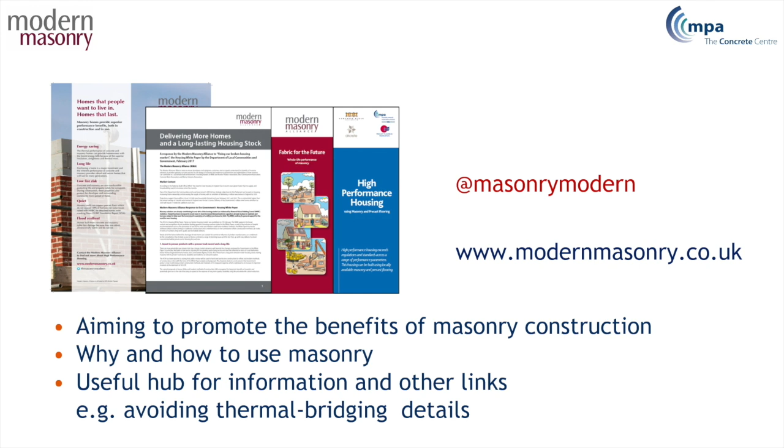Chris has covered what modern masonry is up to. Clearly there's an overlap, and I think it's worth reminding you that something like 85% of housing at the moment has an inner leaf of concrete blocks. You may not know they're there. Many people don't actually know what their houses are built of, and most of them think it's the bricks on the outside, assuming it is brick.

So it's worth just giving it a quick tap when you walk round, and if you get that hollow sound, then you know that it's probably not going to be concrete. So we're talking about really a majority of housing as it's currently being built, and as it's currently meeting standards.

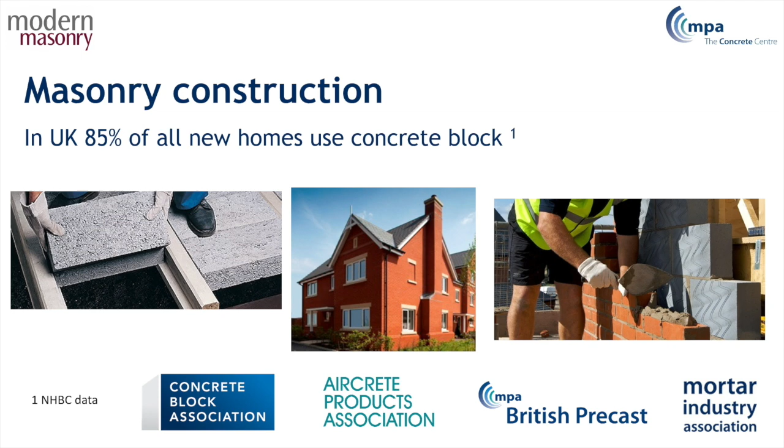I'm going to be talking about well-being as well, health and safety and well-being. Some of these slides are taken from the publication I showed, which was a 10 years review of key issues for industry and those involved in house building and design. Well-being is a subject that has entered the marketplace probably too late, you would argue. It's not just occupants of housing, it's occupants of offices, and it's trying to understand how to create environments both now and in a changing climate in future that will make sure that we're both healthy and comfortable.

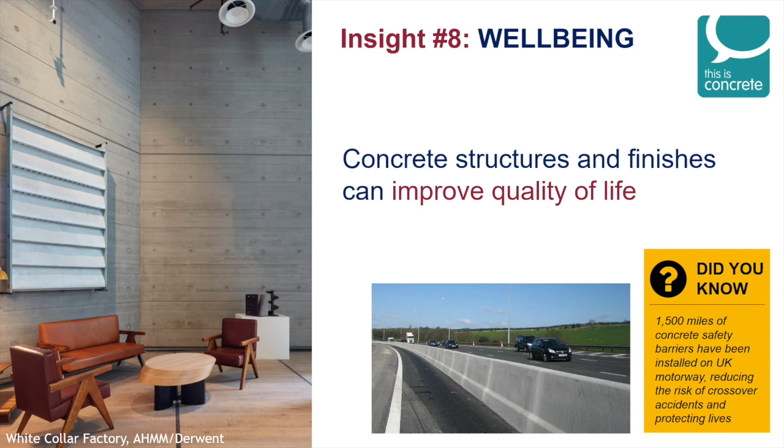So I'm going to move on to that, but I'm also going to touch on some other themes that designers and specifiers are now being bombarded with. They're all aiming at the same place, but from a range of different directions. This quote, resilience is all about being able to overcome the unexpected. Sustainability is about survival, and the goal of resilience is to thrive, I think is an excellent starting point for architects, designers, and those involved in the built environment in trying to look at the long term.

And this is also reflected by the UN Sustainable Development Goals, which you may or may not have read about. But it's very interesting to note that healthy buildings, or health and well-being, is item number 3. It's only when you get to items 11 and 12 where you get down to the built environment and building sustainably. They're all important, of course, and they all have interfaces with each other, so you wouldn't ignore any of them. But it's a change, I think, in perspective as to how we look at designing our built environment.

One of the issues, I'm going to have to put my glasses on, one of the issues that I've raised in a couple of slides here is health and safety. If you're in business, health and safety is one of the key issues, whether you are a producer of products, if you're a building owner, if you employ staff as a company, health and safety is right up there.

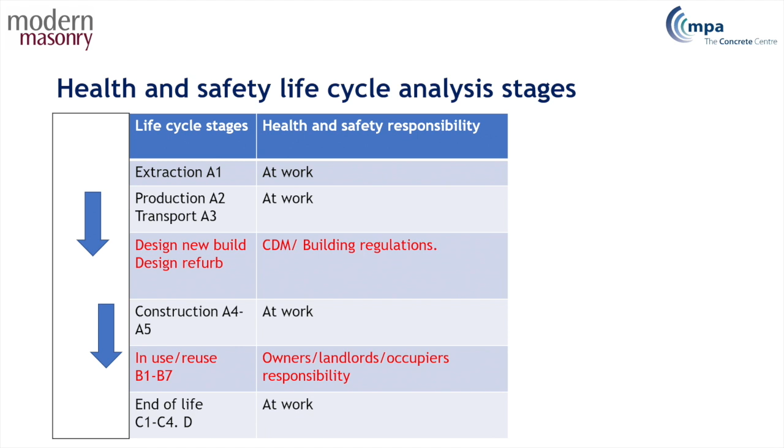But in a couple of slides, I've just looked at some of the responsibilities. At work means health and safety at work, but designers, they've got CDM, and building regulations are there to help you. And then once the building's built, you've got owners, landlords, occupiers who are suddenly responsible for a building. And the health and safety of that and its ongoing upkeep is obviously a key issue, both in the private sector and the public sector.

If you look at health and long-term well-being and the in-use part, of course, some of the responsibilities get extended. And one of the material issues that is coming to light is that you're responsible for the building, you're responsible for the design, its construction, you then own the building, but someone is then also responsible for what happens when it gets demolished. Are those materials safe to demolish? Can they be reused? Can they be recycled? Are they useful at the end of life?

And in an earlier discussion today, we were talking about how long should buildings last. If you're a building owner, you usually want your building to last as long as possible.

Although the lifetime of a mortgage seems to be extending quite a long time. I'm told that if I get to 80, I can still have a mortgage. A few years ago, it stopped at retirement age. I'm hoping to get to 80, by the way, but I'm hoping to get rid of my mortgage before that.

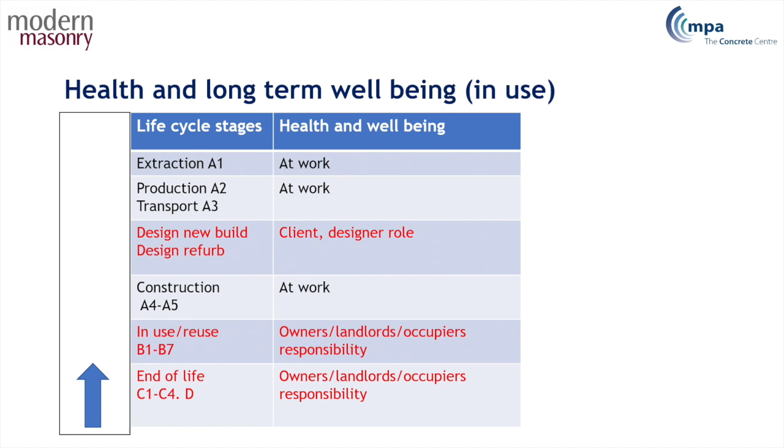But some of these measures that were used in terms of how people looked at property life and how long they were going to last are having to be reconsidered. So health and well-being is now recognised by government as an issue for public health and safety. They're looking at reliance on the use of healthcare services. I'm pleased to say that most of us are living longer. Most of you have achieved quite something already, but also there's whole levels of educational attendance and attainment and productivity and absenteeism if you're running a business, which is all to do with healthy buildings.

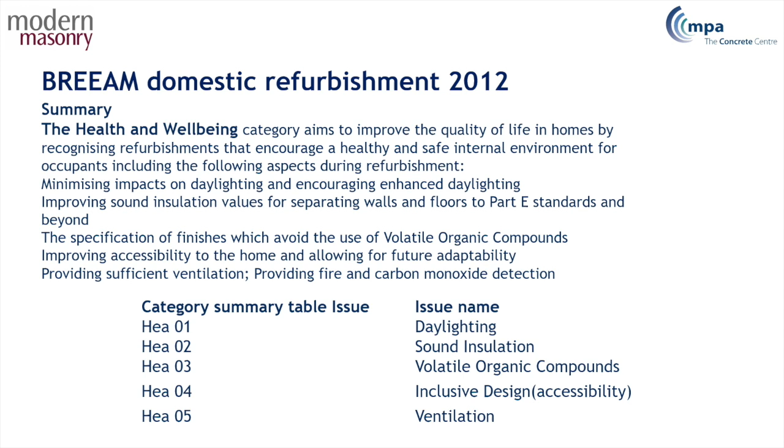And there are some new standards around which you may or may not have come across, originally very much driven by the office and commercial market. So WELL standard, Fitwel and BREEAM have all had healthy building issues built into them for some time. And BREEAM domestic refurbishment also has a healthy building. It's interesting to look at the key issues which touch on some of the issues that Tom touched on: daylighting, sound insulation, the emission of VOCs, for instance, and ventilation. So all those issues that Tom touched on are very much linked to how to produce a healthy environment.

And more recently, probably about 3 or 4 years old now, is the Home Quality Mark, which BRE have brought out to address housing. Unlike previous standards, it's very much focused on the house owner rather than the house builder. And so I've listed a whole range of things which I won't go through, but they are all key issues there. I highlight comfort, indoor pollutants, daylight, internal, external noise, sound insulation, and then durability of construction, and then recyclable waste, water efficiency. So there's a whole range of issues now that are moving up the scale in terms of issues that designers need to take on board.

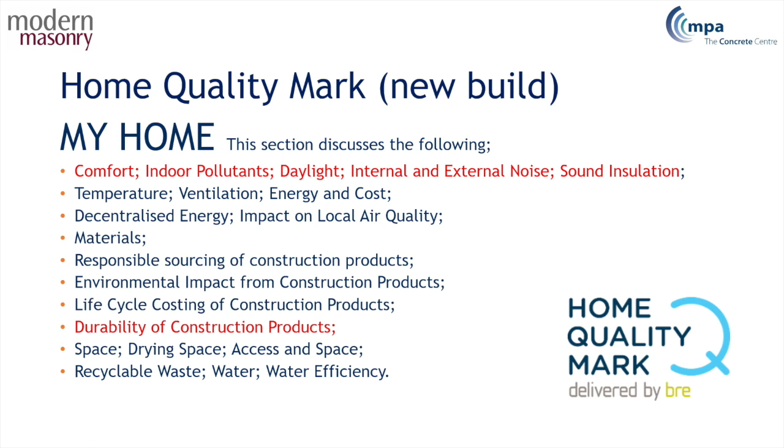So moving from health and safety and healthy beings then leads me on to the resilience part of my talk, because I think it's fair to say that we are recognising that the climate that we're building our buildings for is changing. We're designing buildings for 50 or 100 years' time, and even now we're getting the odd freak weather which challenges some of the design considerations for which the buildings were built.

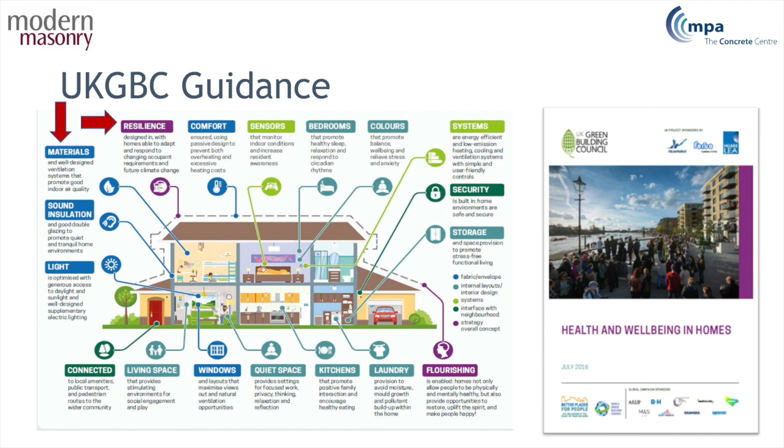The UK Green Building Council has done a whole thing on health and well-being in homes, and I just draw your attention to the top left-hand corner, which is what I'm going to be talking about, which is choice of materials and then the resilience issues. End-of-life resilience I've touched on, but when you're talking to a client, very few clients as an architect have I met who know how long they want their building to last. This morning we saw a client who knew he wanted it to last at least 100 years or longer. But these are key questions when you're making material decisions and design decisions about property.

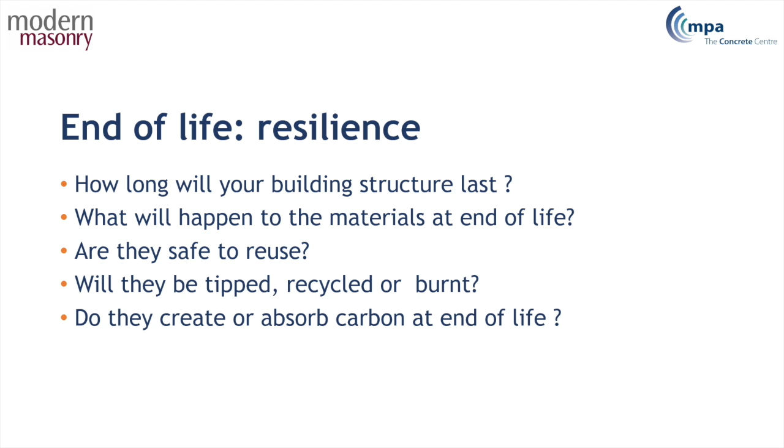So how long will your building last? What will happen to the materials at end of life? Are they safe to reuse? Can they be recycled? Do they have to be burnt? Do they create or absorb carbon at end of life? These are some key questions.

And I think it's fair to say that most of us recognise that keeping a building to last as long as possible is a very good way of meeting some of the circular economy requirements. The longer it lasts, the longer your investment in product, materials, carbon is useful, and the longer before you have to then downgrade the building to a point of having to rebuild it. So reusing your structure is pretty key to that in a whole range of building types.

There are those who are looking for design for demountability as a way forward. It's probably difficult to justify the cost unless you have a relatively short-term building, and I don't think anybody's really worked out what those key parameters are yet. But it's worth pointing out that concrete and concrete blocks are 100% recyclable, so at end of life you can reuse the material.

To touch on something that Tom loves to talk about but wasn't allowed to today - when you crush concrete at the end of life, it reabsorbs carbon to something approaching 20% of the original embodied carbon. So if you're taking a whole life view of your building materials, that's something you need to think about.

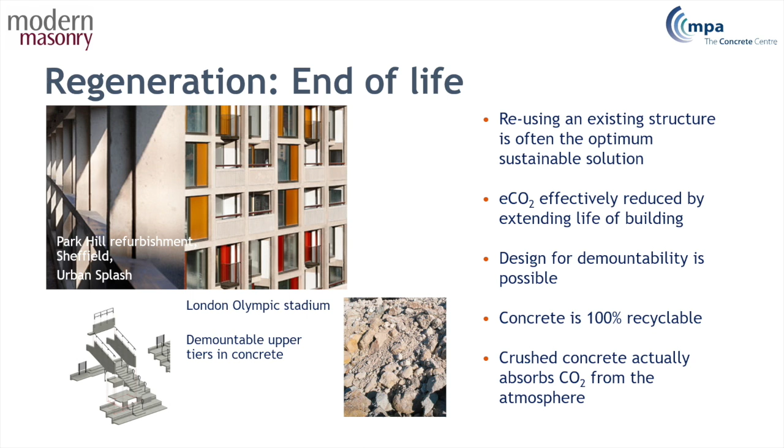I think it's fair to say there's a lot of noise about building lots of new houses, but we are struggling to get anywhere near the 300,000 that I think is generally accepted as a minimum. I've taken this article from Housing and Planning, and based on the current replacement rate and our building rate, the houses we build today need to last about 2,000 years. Quite clearly very few of them will, unless they have an awful lot of work done on them. So even masonry houses lasting 2,000 years, I think, would be a claim too far.

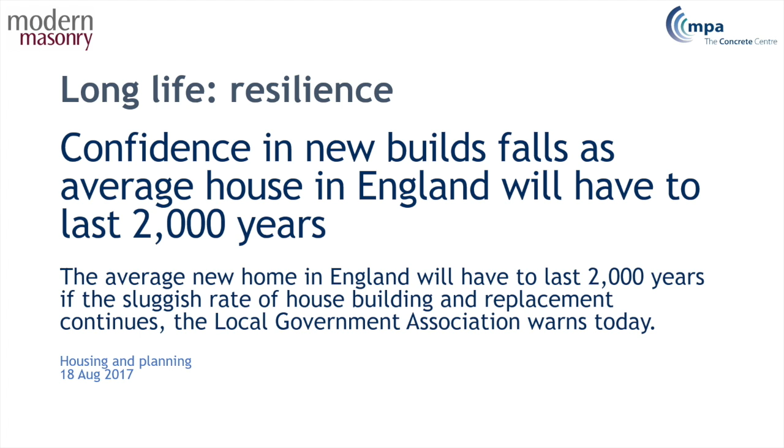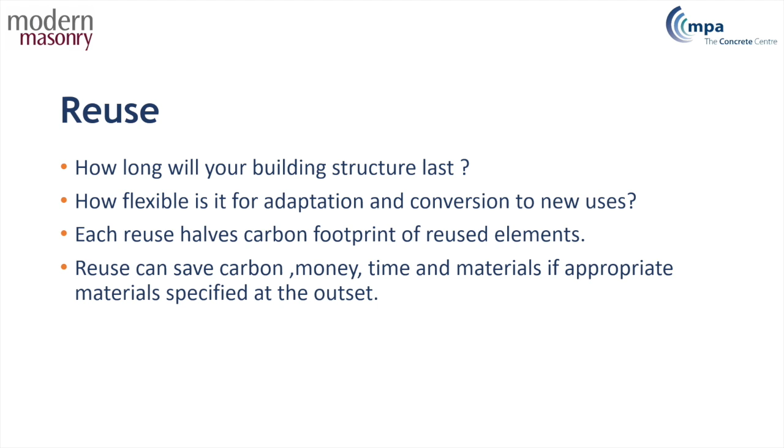So again, looking at reuse is quite important, and this re-emphasises some key issues, because it's not just how long your structure lasts - it's how flexible the building is for change, to accommodate over a longer lifetime its use.

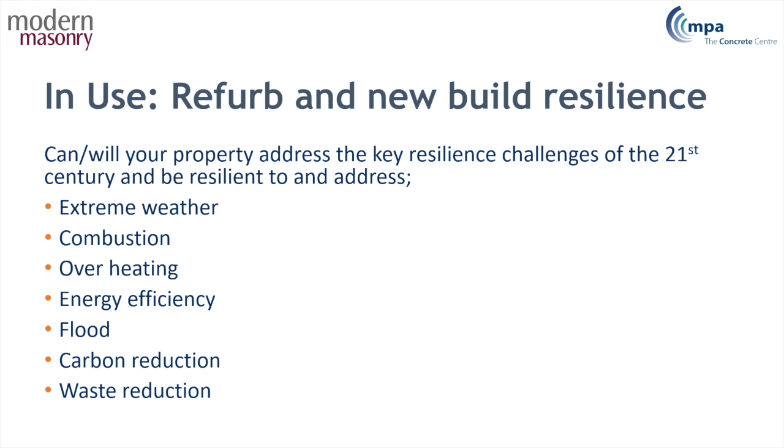I think the other thing we talk about in terms of resilience, looking at refurb and new build resilience, is some of the things we should be designing buildings to cope with in the future. Extreme weather I've touched on, combustion, overheating Tom's talked about, energy efficiency, flood, and then some key issues like carbon reduction and waste reduction, which we need to be thinking of.

We've already seen, and unfortunately regularly see, flooding and storm damage on the news. And the overheating issue came about, I think, a few years ago - there were thousands of people who died in Europe over a very hot summer. And we've had a very hot February.

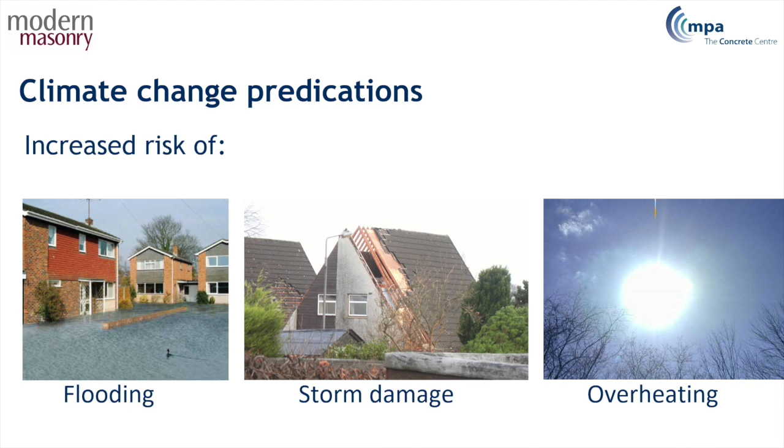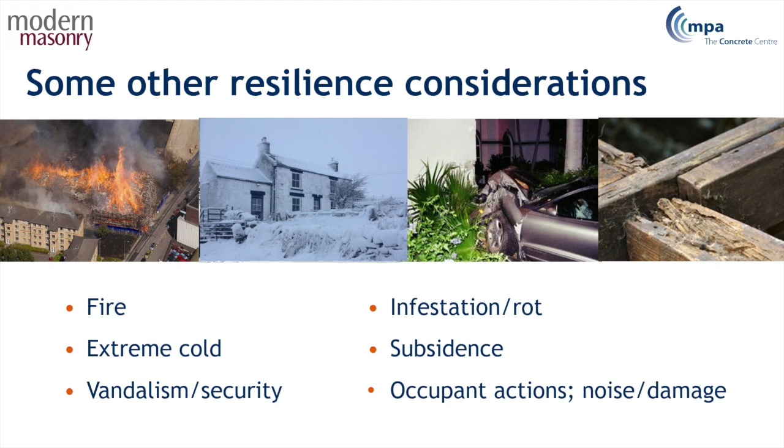So other resilience considerations that you as designers and/or building users or procurers need to think about are a range of how materials operate. And I think it's fair to say that resilience, if properly considered, is good business. People don't necessarily see housing as business, but actually it's people's largest asset as an individual, and clearly a key part of meeting the requirements of a growing society with growing aspirations.

So I'm going to talk briefly about fire. It's a sensitive subject at the moment, and we're still awaiting to see how the post-Grenfell fallout will impact on standards, with consultation in Part B going on at the moment. But it's fair to say that fire safety of occupants is essential and it's part of building regs, but there's not a lot in building regs about the impact on the property itself.

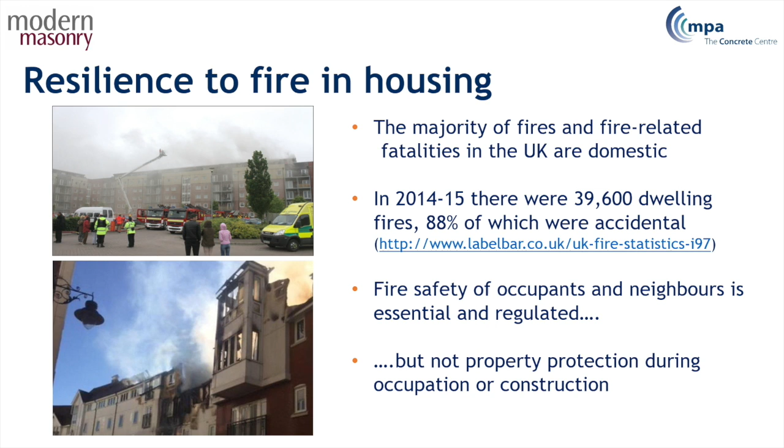Getting people out is a key consideration, no one would argue with that, but then the question is how long does the fire burn and what's left afterwards? I think that's a key issue we need to be considering. It's a sustainability issue in the sense that buildings set on fire by vandals halfway through construction is not a sustainable solution. It's criminal, no one would argue with that.

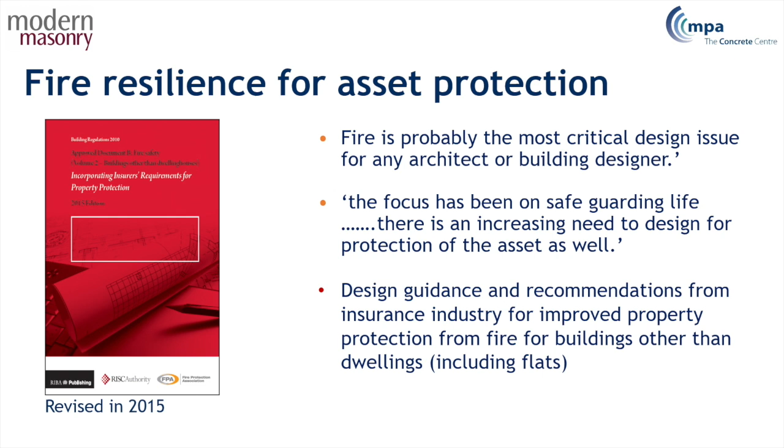But there are some key issues there we need to be thinking about, how we don't have to build things twice. There's a range of design guidance and recommendations from the British Insurers Confederation, because they clearly have an impact - people have to insure buildings and they're worried about the risk arising from some building types and constructions. So I'll leave you on the fire safety bit.

Occupier behaviour is a major reason for fires, but I think it's fair to say that the design characteristics of a building will affect the potential for a fire to spread or to be undetected, and therefore impact on the likelihood of fire causing harm. And those are not my words - they're the words of a government paper in English Housing Survey.

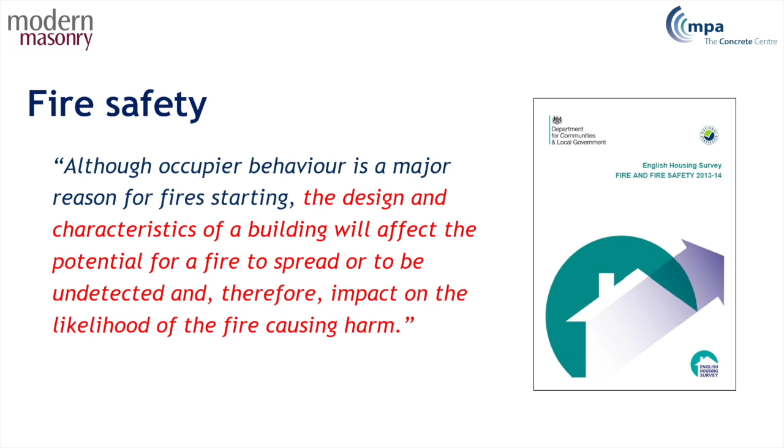So the message I would give you is we ought to be looking at low risk construction details using non-combustible materials. Concrete and masonry obviously fit into that. And then look beyond the materials at the consequence of detailing, poor workmanship and alterations when the building's finished. What do people do? They drill holes, they cut openings, they leave buildings not in the state they were originally designed, and I think that's an issue we need to be much more careful about. So careful detailing is required, as it would be with all materials, but I think it's fair to say masonry doesn't need special measures for health and safety during construction.

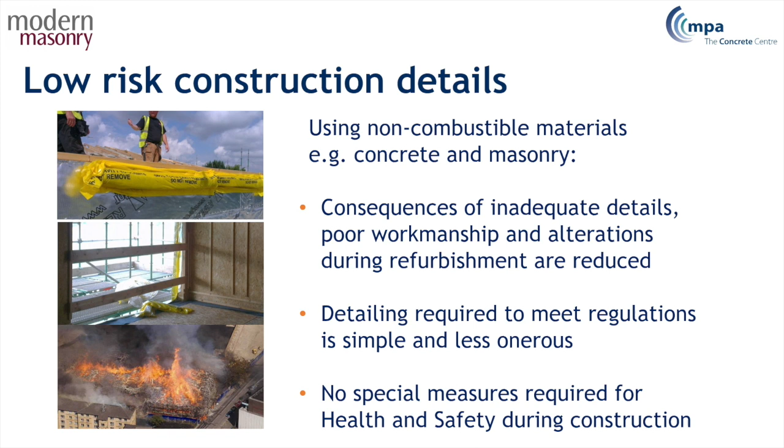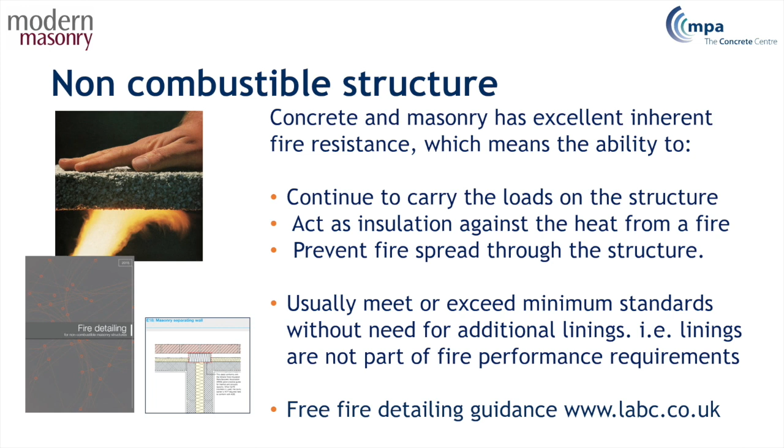So we'd promote a non-combustible structure. It does have key benefits in the event of fire, but it doesn't prevent fires. So I'd also look at some very good free fire detailing guidance issued by LABC, that's the Local Authority Building Control, and they have a range of details that are appropriate for masonry construction and how to make sure the spread of fire is limited.

So moving on to other resilience issues we need to be thinking about. We've touched on overheating, Tom's talked about it. I'm not going to spend too long on this because there is some overlap. But interestingly, whilst there is a heat map, even the Scottish government are worried about overheating, and it's not necessarily because they'll get the same temperatures as the southeast, but a lot of it is to do with lack of ventilation and bad design. So overheating can be a problem even in Scotland.

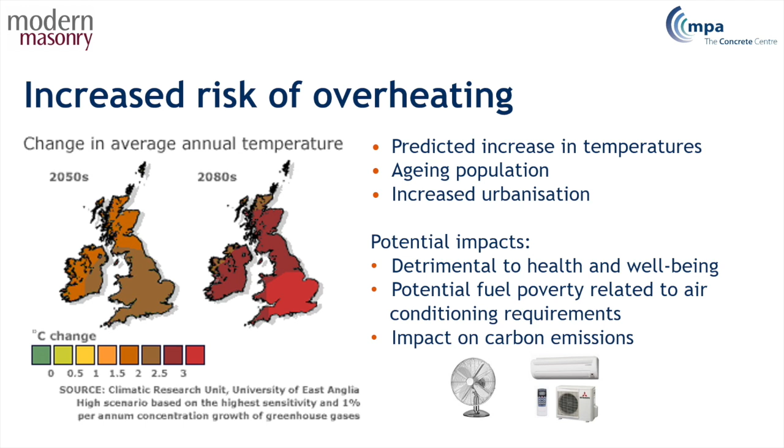It's difficult to consider. I've lived in Edinburgh and I think it's one of the coldest places I've ever spent my time in, but it was in one of those tenement buildings built out of lots of solid masonry, so I blame the construction.

So one of the things Tom normally talks about is the passive approach to reduce overheating in new homes, and this is using ventilation and some key issues in terms of orientation, solar shading, planting. You can plant to protect your house from too much sunshine, the thermal mass aspects that Tom's spoken about, ventilation, and...

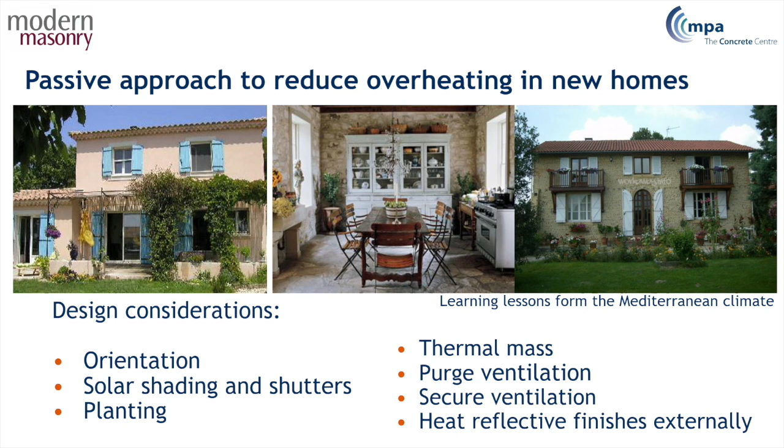I used to have a house in the south of France, and I can remember there, we're promised that climate by the way, but unfortunately not quite in my lifetime, but the population there moved from one bit of shade to the next, and they keep their shutters closed, they keep the sun out all day, so there are ways of living to overcome this already existing where Mediterranean temperatures exist. And if the warming happens as predicted, the south of England is certainly going to be having very similar temperatures, not in my lifetime, but certainly in the lifetime of the buildings we're designing now.

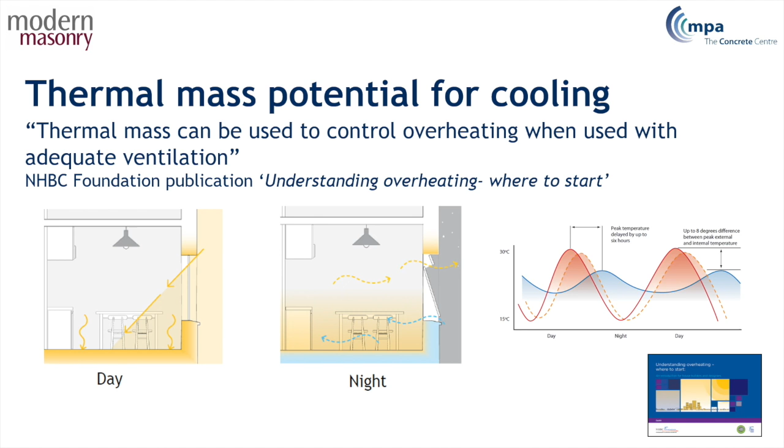The thermal mass potential for cooling, these are one of Tom's slides, and I'm not going to go on, but it does help create and even out temperature differences, both in winter and summer. It does have to have ventilation with it. It has to work in that way, and it works in some buildings better than others. It's not a panacea for all cooling, but it is something that needs to be considered as a designer when you're looking at residential, and it's almost a no-brainer in office buildings.

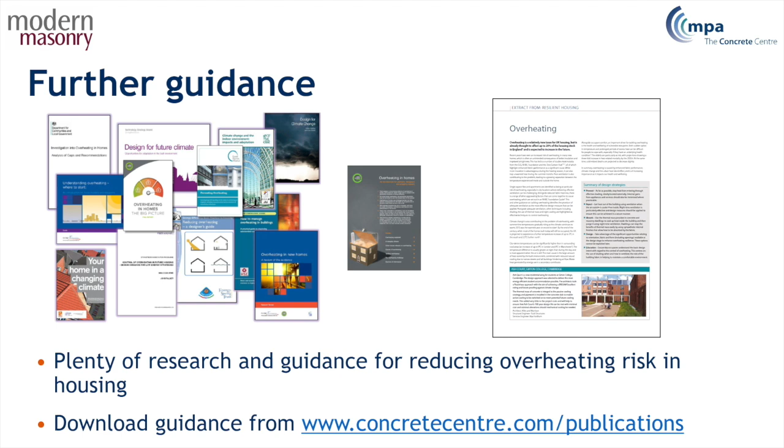There's a lot of guidance, not from us, I hasten to add, from a range of sources. We have got an overheating brochure on our stand, but there's a lot of guidance from NHBC, for instance, and I thought for architects it's always good to relieve the words with a few pictures of buildings that have used thermal mass effectively with masonry construction.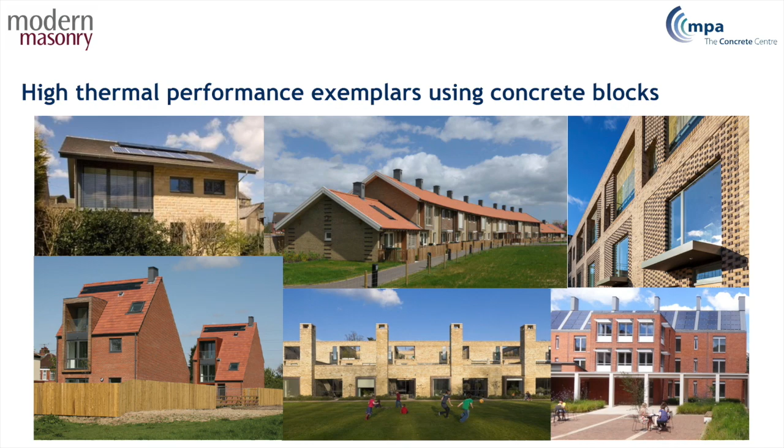Tom has already alluded to some of these publications available for free on our website. And I think Tom admitted he's about to spend his life updating Part L when the government reviews building regs, which are coming up this year. So we'll be looking very closely at how that impacts.

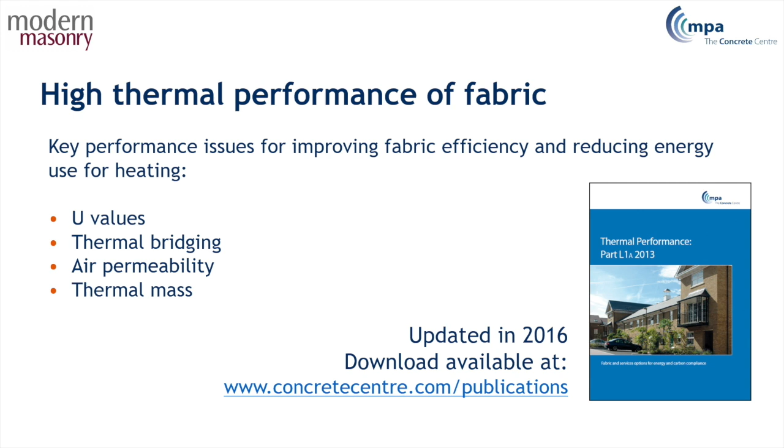I think we all thought we'd got to a point where the external fabric of the building was at an optimum level. A little bird tells me that might not be so. So we might be finding that higher levels of insulation to the envelope are on their way, with all the implications that go with that. But I don't know that, that's just me guessing. Either way, I think combined with changes in Part B and Part L, we're up for some quite significant review of how we build and design our buildings.

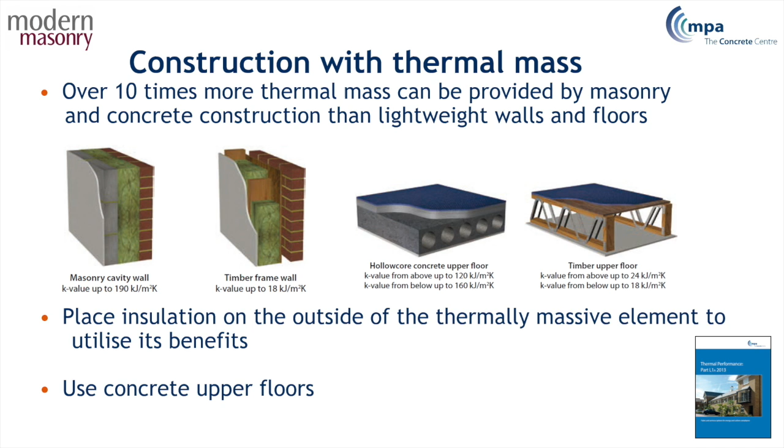So Tom's covered the construction with thermal mass, walls and floors. I'm not going to go into that. So we then move on to flooding.

Unfortunately, many of us live in areas where flooding and Environment Agency warnings are a familiar tale. Those of us who've lived quite a long time can remember whole bits of London being flooded. A lot of that has been remedied by good measures, but they still reckon that 1 in 6 properties are at risk of flooding in the UK, and clearly the increase of 40% in residentials exposed to flooding by the 2080s is a pretty frightening thought.

I think there's a very simple argument, that we shouldn't be building where we are building, but unfortunately the economics of using floodplains for housing drive that, and still are driving that.

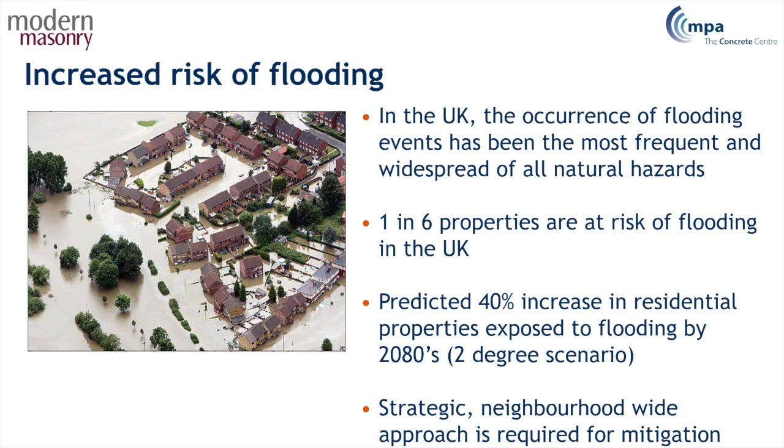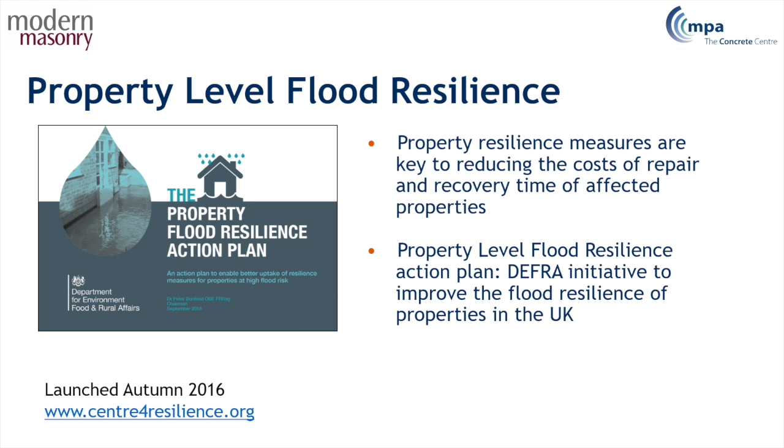I think there are some significant measures that are now reasonably being taken to ameliorate some of the impacts. There is a document I'd lead you to, the Property Level Flood Resilience document, which came out in 2016 as part of a DEFRA initiative to try and address this issue. I'm afraid that all these resilience issues have been overtaken by Brexit in the last couple of years, but hopefully we'll get back onto more reasonable subject matter soon, without hopefully the flooding that might provoke them.

It's also worth mentioning that flooding doesn't always happen where the Environment Agency says it's going to. We quite often get flash floods from places that no one anticipated, so it's worth looking at the local geography and the potential. Unfortunately, if you're mining in Brazil, there are some uncertainties in terms of impacts of sudden failure of some of our infrastructure. And even at a water pipe mains level, it can cause pretty good chaos in the UK.

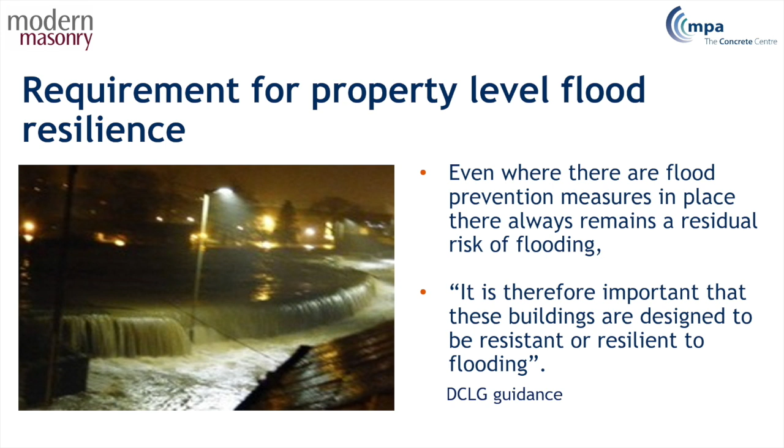So the latest guidance is BS 85500, not to be muddled with 8500, which is the latest concrete BS, lightly reviewed. Sorry about that, but I couldn't resist.

There are some clear definitions and recognition in there of some of the things that concrete can do and timber can't. Again, that's something that needs to be looked at by a designer when he's making those design decisions.

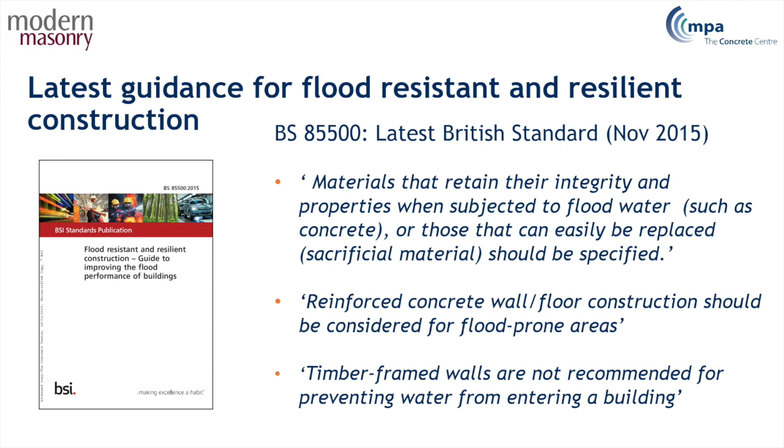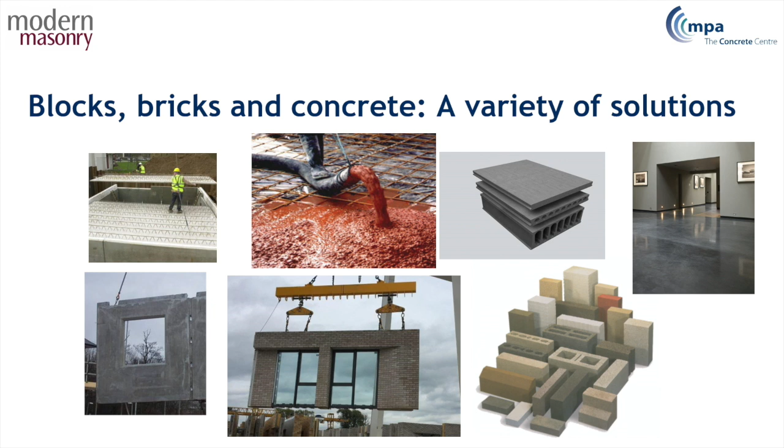As you know, concrete comes in a variety of forms. One of my colleagues calls it like mixing a cake mixture, it's just a matter of which bits and what parts you put in to come up with what recipe. So the variance and the variety is enormous. When you say concrete, people think of one thing, but actually it's thousands of different potential materials and makeups that can be designed specifically to suit a particular requirement, and they are.

I don't think anybody can talk about concrete at the moment without mentioning embodied CO2. It's not something that you can avoid, it is an existing issue. But interestingly, if you look at the NHBC guidance on housing, the difference in embodied CO2 between a timber frame house and one with masonry at day one is negligible. And if you take into account the thermal mass benefits over the life, after about 11 years, it's overtaken by the efficiencies of thermal mass. And after that, of course, there are huge benefits.

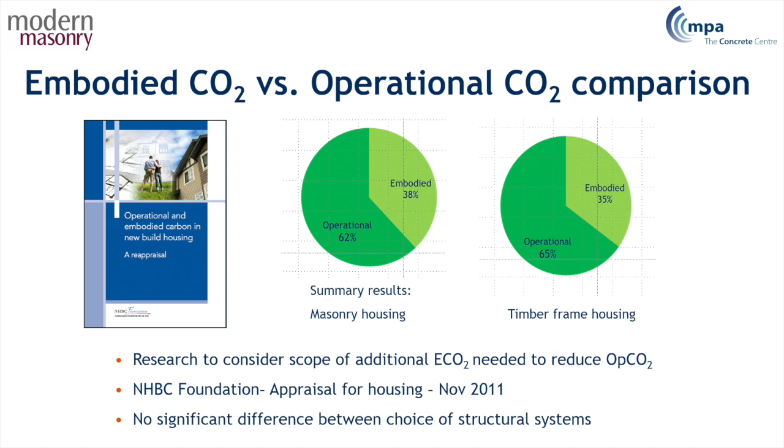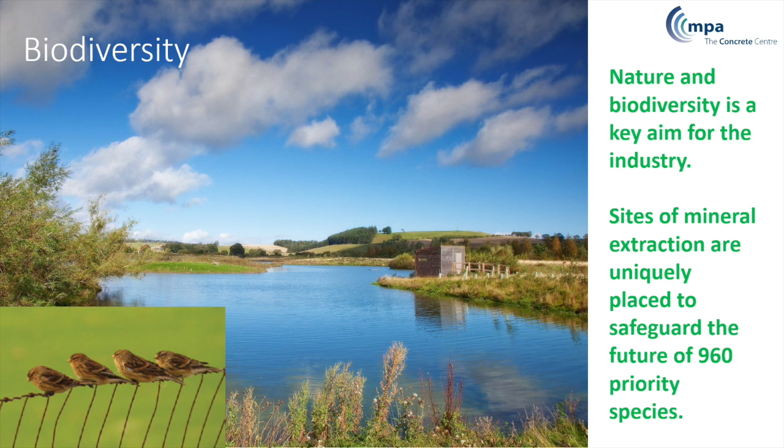It's always nice to have a bit of relief. People ask, where do your products come from? It's fantastic that they're local and come from round the corner. If you live round the corner, it's not always a huge benefit, but afterwards, I think there are something like over 400 triple SIs which are now used as nature reserves, created from cleaning up and making sure that quarrying is not a disaster but a benefit to those at the end of its life. Pretty critical. There's a whole range of nature notes and other issues that come out of that, where the post quarries are used for both recreation and natural environment help.

I'm going to leave you with two slides, one of which is just looking at the traditional sustainability headings of social, economic, environmental, and some of the resilience and key issues that I've been talking about. I think taking structural performance as read is reasonable with concrete, and then if you look at the tick boxes, there is a whole range of issues on the resilience performance of the product. And if you go to our stand, you'll see there's a document that says concrete credentials, which can give you a lot more detail on that.

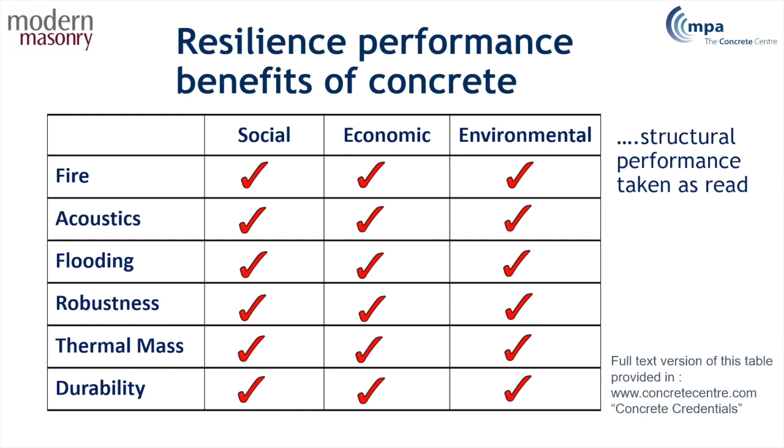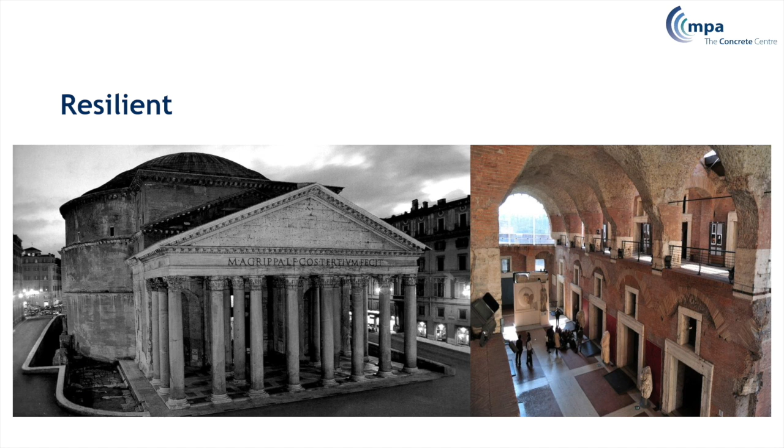And I always finish on this slide because it's got nothing to do with housing at all. I don't think anybody has lived in either of those buildings, but they rely heavily on concrete and brickwork, and they've been around for over 2,000 years. So on that note, I'll leave you to ask me difficult questions, I hope. Thank you.